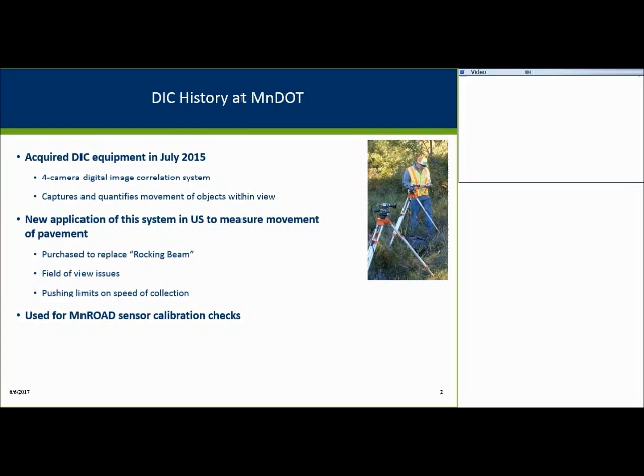That was quite a large learning curve, but we're essentially very comfortable with the system now. We're also able to use this for calibrating MnROAD sensors, so that's another application that we found is very useful for this particular system.

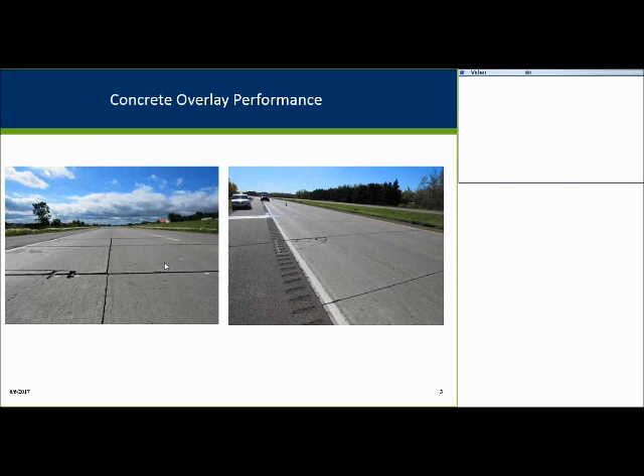My business is trying to characterize what's going on with concrete overlays. You can see by this picture some panels have been moving around. We're very interested in characterizing how they're moving when a vehicle's traveling over them. We can use strain sensors and LVDTs and that type of thing, but really we want to fundamentally know what's happening when a vehicle's traveling over these particular pavements.

So these are kind of the movements that we're interested in measuring—whether it's bending of the panel, or if it's tipping, or you're getting transfer across the joints of the pavement.

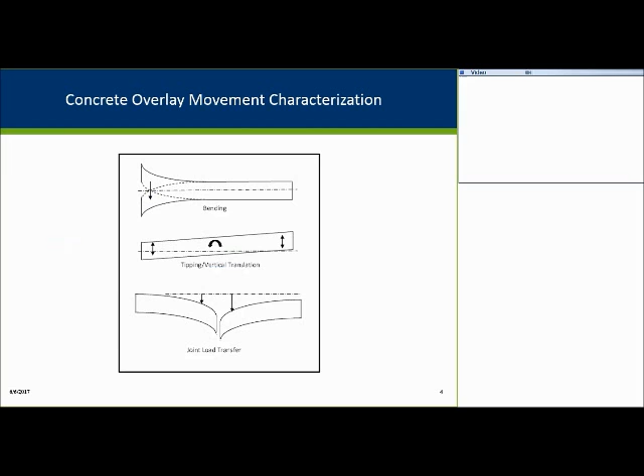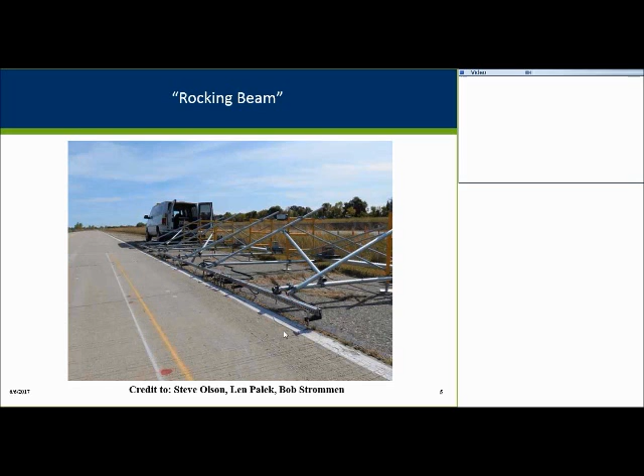This is the infamous rocking beam that I have to credit Steve Olson for being a large part of developing. It essentially consists of a very long piece of metal with LVDTs hanging from the bottom, and as the truck goes by and the panels move around, this system measures it with fairly high accuracy and very good precision. As you can see, it's very clumsy, very hard to set up, not very portable, and it has limitations—you have to hang it off the side because you've got to get the vehicle through.

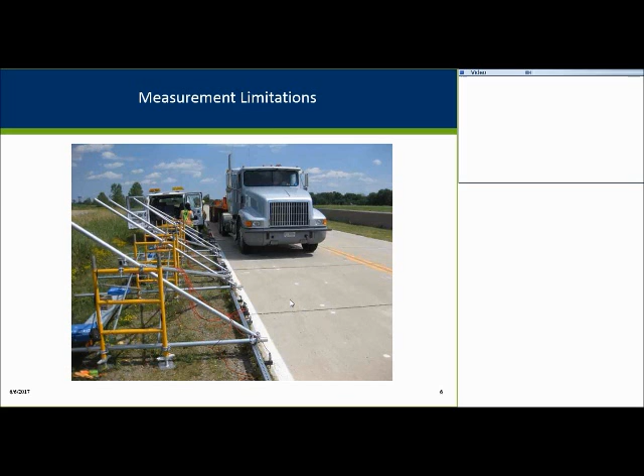This shows at the MnROAD test facility the MnROAD truck going by, and we're measuring the response of those slabs as the truck goes by. So again, you're limited to measuring what's going on at the edge. That's not ideal.

So we found this digital image correlation system. I thought this is a great way to get rid of all that hardware. Essentially, this system, as it will be described later, you can just point it at things, and it's going to measure how things are moving.

We actually took this out on several county roads to measure the movement under live traffic. We have a number of targets that we just glued down, and by pointing at those targets, we can measure and do the same measurement that we had with that rocking beam.

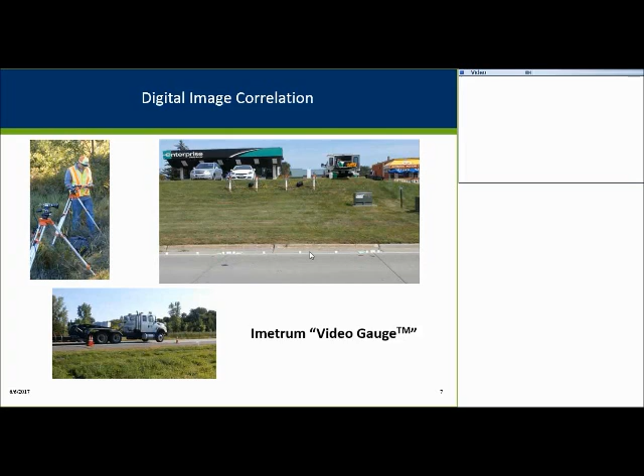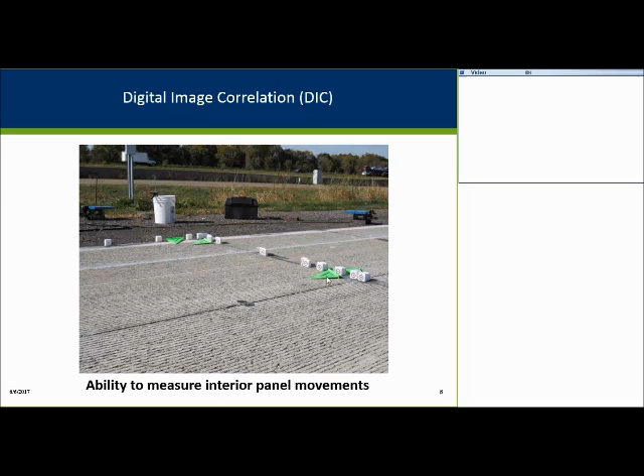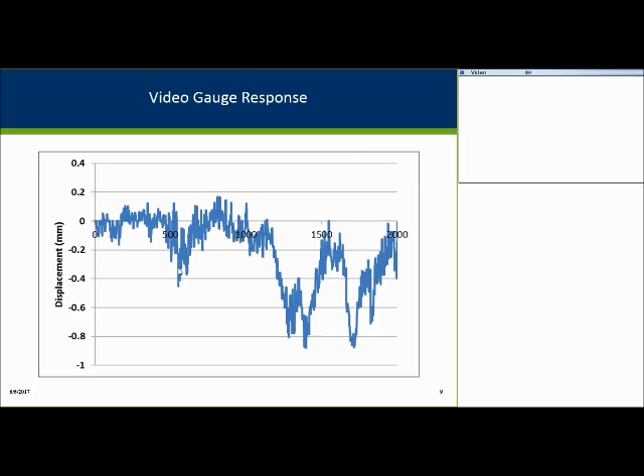And at one point, we actually even pointed the cameras right at the tips of the LVDT to verify that they were both moving in unison. So we're very comfortable that this system has the capability of measuring what we need it to do.

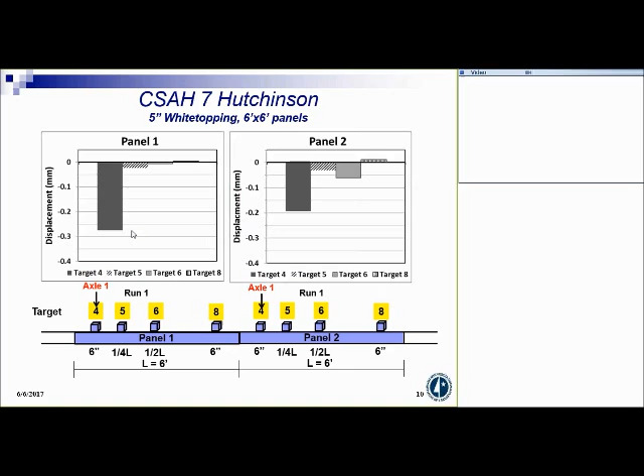So essentially, we learned that as the wheel hits the panel, it's deflecting down. It's not tipping the entire panel. So these are important things that we're trying to figure out as we're doing our research.

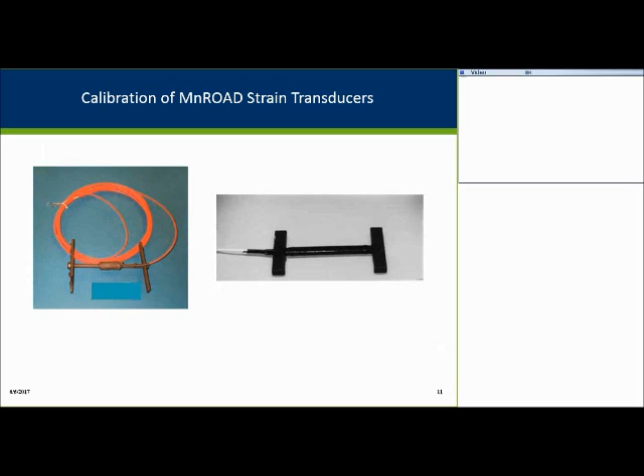As I mentioned before, we also discovered it's a useful tool to calibrate strain gauges. Again, in this case, it was asphalt strain transducers that were being installed at the MnROAD test facility. So here you can see we have a test stand, and we just insert the transducer in there, and then we manually pull and compress it.

Lighting is a very key concept in this process. You need to have very good light. But one of the things about this video gauge is that it actually is designated as an ASTM extensometer, so that's exactly what you need for doing this type of calibration. We're trying to compare, as you pull the sensor, what the video gauge measures compared with what the system is producing.

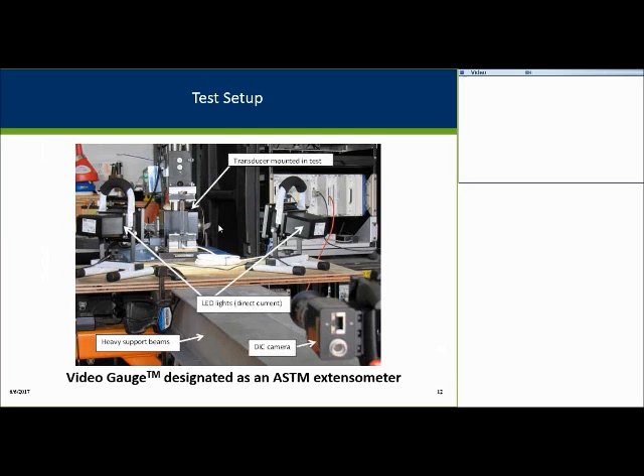We learned a lot of things about where to point it. We had some errors in where you're targeting your image, so you can very specifically target certain areas of the gauge. We had to end up going here at the end of the leg.

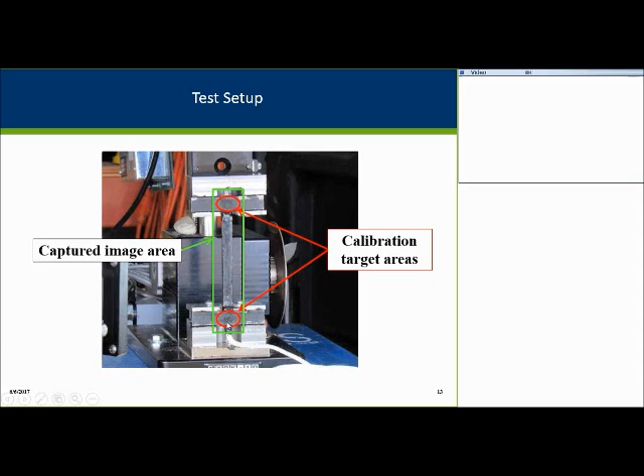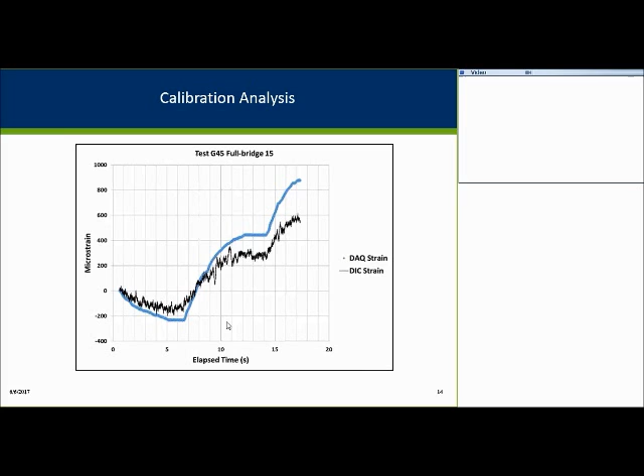So with that, hopefully that was kind of an introduction of how MnDOT's been using this particular system, and now the presentation is going to focus on the other applications the system is being used for, and that's where Amy is going to talk about that. So I'm going to turn it over to Amy at this point.

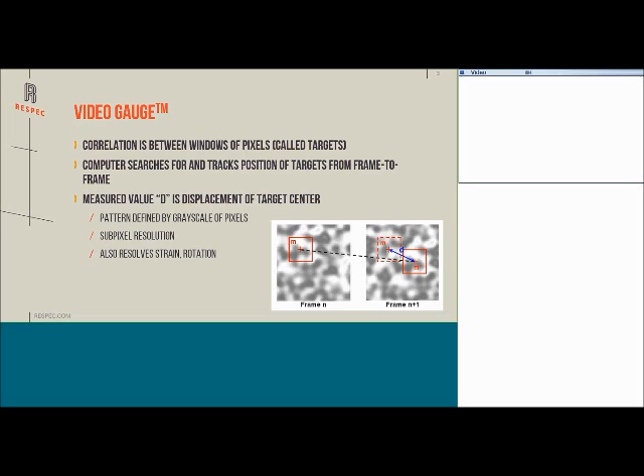And so the equipment is pretty simple. The cameras run off of a system controller, which is just a specialized computer. The cameras are all CCD cameras, and so none of the cameras that we use have storage on the camera. All of the data is transferred directly back to the camera controller while the video is recording. Most of the cameras are powered over the Ethernet cable that also transfers the data, but some of them do need an external power or battery pack, and those are our high-speed cameras that require the extra power.

The cameras are mounted just on a surveying tripod, and that's the entire system. And so the controller can be either powered from a main supply or powered off of batteries when you're in the field. Each controller can run up to 4 cameras. Sometimes additional cabling is necessary to synchronize the cameras if you're using a multi-camera system or for high-speed applications.

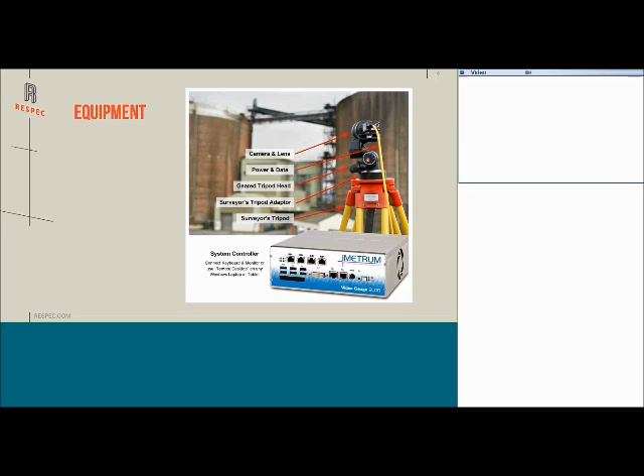And overall, the system's extremely versatile. The speeds are defined by the camera, and the field of view is defined by the camera lens. And so you spec the camera and the lens to your applications. The software is loaded onto the camera controller, and these videos are collected within the software. The processing can either be done in real time when the video is being collected, or the video can be saved and the measurements can be post-processed. So targets can be added or moved after the fact. Post-processing is required for high-speed applications, but for most structural applications, we're able to make real-time measurements in the field.

And so the first case study I want to present is of a steel bridge in Somerset, UK. The developers of the software, Imetrum, are based in Bristol, UK. And so some of these case studies that I'm going to present today were collected by Imetrum, and some of them are RESPEC projects. This first one is obviously an Imetrum project since it's in the UK.

It is a short span rail bridge, and the train that goes over the bridge is a rock quarry train. So it's a heavy vehicle, and it's traveling at 90 miles per hour. There's a drive unit on both sides of the train, and there's 8 cars in between, and we'll be able to pick out in the bridge response each axle for both drive units and the cars.

So in this study, we have both video gauge measurements and measurements from potentiometers to verify the video measurement. The video collection rate is 500 hertz because we expect small, short-lived displacements on this bridge. And our video measurement resolution is 1/10 of a millimeter.

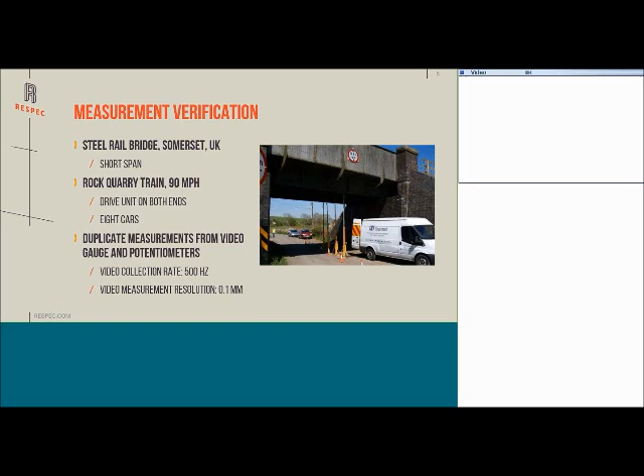And so here is the comparison of the displacement results between the potentiometer and video gauge at 1 point on the bridge. As you can see, there's excellent correlation between the two measurements. At the beginning of a test, we always want a static period to define the zero location of our measurement.

And as the drive unit passes over that point on the bridge, we get our greatest deflection, which is approximately 1.35 millimeters. And then we see a rebound between the front axle and the rear axle on the drive unit. And then this next peak is the first axle on our first car.

So then we have a rebound between the wheels on our first car, the coupler between the first and second car, and then our subsequent 7 more cars. And then we have another great response from our rear drive unit.

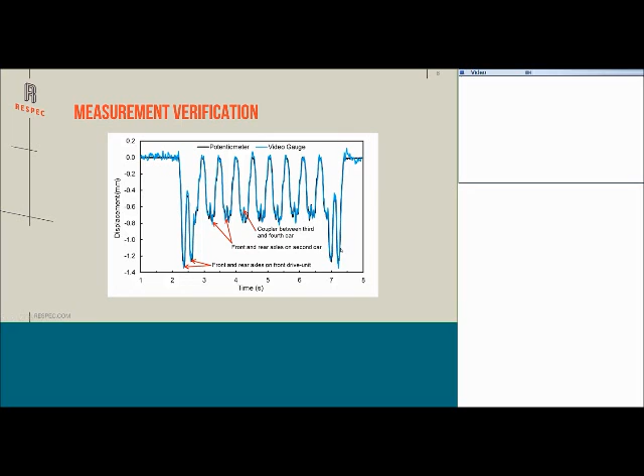And so the advantages of using video monitoring for this application over the conventional instrument, or that potentiometer, is video gauge is fast and easy to set up. Our workers and equipment are out of the traffic, whereas with potentiometers, you have to be able to access the structure, you have to set up your instruments, you have to block off traffic. And so it's a lot more complicated of a setup than just showing up on the side of the road, setting up your camera, and taking a video.

We also have the option for post-processing with digital image correlation equipment. We can add measurements after the fact. We can move measurements. So if we miss the peak deflection on the structure, we're able to capture it after the fact, whereas with conventional instrumentation, you set it up at your 1 point, and that's what you got. You have no chance to repeat it without setting up an entire new test.

And all digital image correlation packages are multi-point, and so you can set up as many points as you want in the field of view as long as you have sufficient pattern.

The next case study that I'll go over is another steel bridge in Ludlow, UK. It is a bolted steel bridge, and this is also a rail bridge for passenger trains that drive at 50 miles per hour and coal trains that drive at 20 miles per hour. And this study is a duplicate study, and so the client brought Imetrum back out to take additional measurements of the bridge, specifically focusing on each joint in this steel bridge.

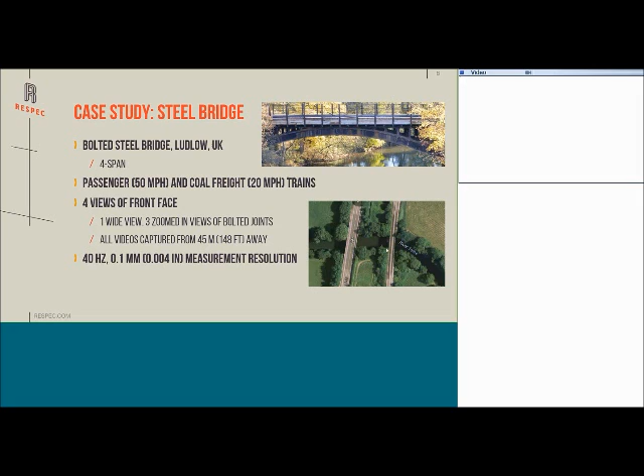And so here are the camera views that were captured from that 150 feet away. And so all 4 of these images were captured using the same model of camera, just outfitted with a different lens. And so these top images of the bolted joints, those will be of a longer focal length lens, whereas a wider angle lens is used to capture the full bridge.

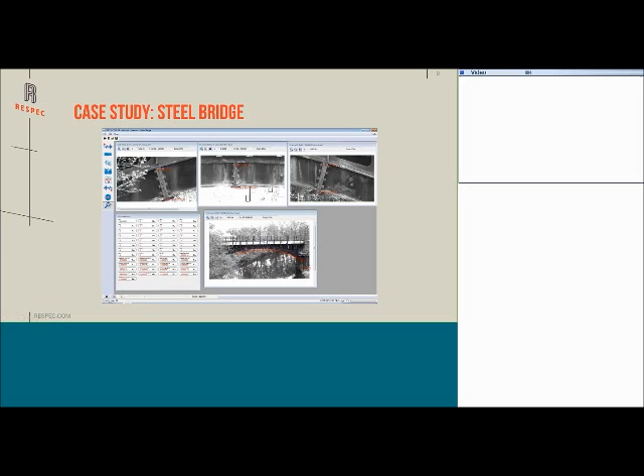And so measurements were made on each of the joints to measure any extension of the joint, so opening and closing, as well as at every stringer there was a vertical displacement measurement set up. And so here are the vertical deflection measurements of the stringer at the mid-joint.

Our maximum deflection is 14 millimeters, and so that's quite a bit more than our last bridge, or especially what we would expect out of pavement. And so that's why in this application, 40 hertz is adequate to give us this nice deflection measurement, because we have large deflections and a pretty slow response.

These results are for a coal train moving at 20 miles per hour, so also slow traffic. Underneath this green box is one of the bolted joints, and this green box is what we call a strain map. This is available in all digital image correlation packages, and it tracks every pixel.

It's making a contour map of the displacements or strains. Over here we'll have a plot measuring the extension at the top of the joint, and we'll be able to see a contour map of the strain as the train moves over the bridge. I'll go ahead and start the video. Up here is just a screenshot out of the software, showing a display of all our measurement points, any graph we've defined, and our video image.

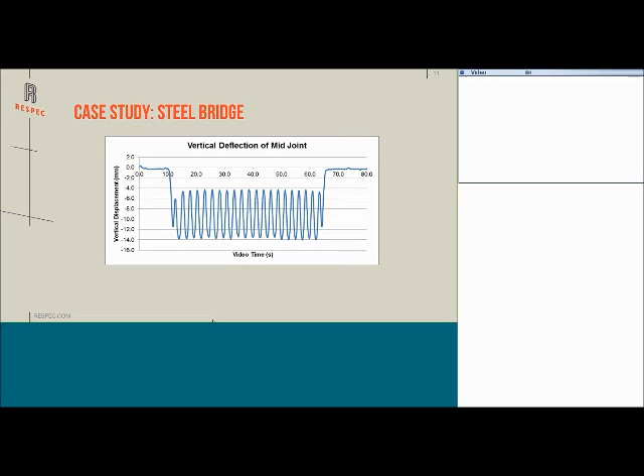The maximum extension of that joint was 1.7 millimeters. These vertical deflection measurements were made across 21 stringers, so 21 different vertical measurements, as well as these in-depth investigations of all the joints.

This next case study is of a railway, an example of a high-speed application. The trains on this rail have a speed limit of 120 miles an hour, but there are rail restrictions in the UK, and if the rail is deflecting too much, they need to put a speed restriction on the track.

Video gauge was chosen for this study because there was limited access to the track. It was impossible to use conventional instrumentation because there was no access.

We did need to spray paint targets on the side of the track. We needed to get close, but couldn't be close during train traffic. Natural pattern was used to make measurements of the ties and the ballast, but for the rail itself we needed additional pattern, so we used spray paint. The videos were captured from 7 meters away, about 23 feet from the track.

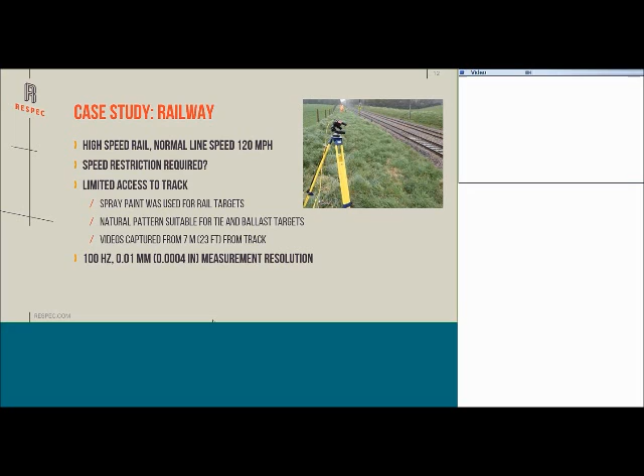These videos were captured at 100 hertz, or 100 frames per second, and we have a smaller field of view in this application. We're focused on a pretty short section of track, so the resolution in this measurement is 0.01 millimeters, or 1/100th of a millimeter.

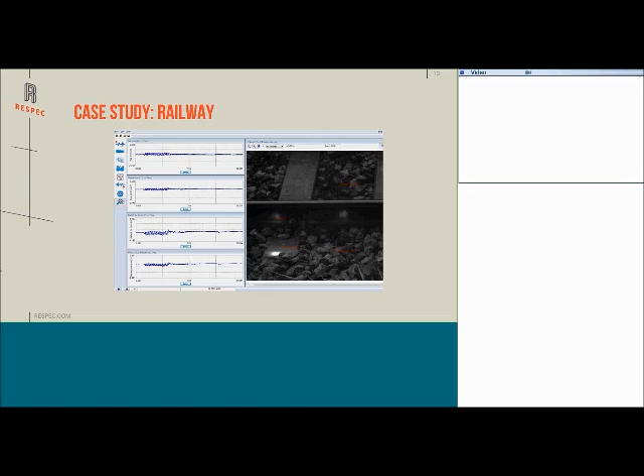As I start the video and you see the displacement response come across, this little bit of vibration is caused by a train passing on the adjacent track, not the track we're focused on. Any minute now, our train should be coming along.

So I'll pause it and describe what's happening. Here we have a target on our ballast material, and in the center of our track we have spray paint marks that we're tracking the displacement of the rail with. We have a target on the tie clip, and then also a target in our ballast material closest to the camera. So from top to bottom, this graph is for our rail deflection, the second graph is for our tie, and then these bottom two graphs, the top one is the far ballast, and the bottom one is our close ballast.

The rail displacement, the maximum displacement is approximately 7 millimeters, and then we do see 5 millimeters of rebound, for a total of 12 millimeters of displacement.

Our tie is displacing more than that. It displaces 9 millimeters down with a 5.5 millimeter rebound.

So the most interesting part of this study is the far ballast measurement, because as our train passes, that target is blocked. But every time we have a clear shot of the ballast in between wheels, the software is able to reacquire that target and continue to make displacement measurements. So we are able to measure the rebound of the far ballast and then the full response of the close ballast material, which is about 7 millimeters down and 2 millimeters of rebound.

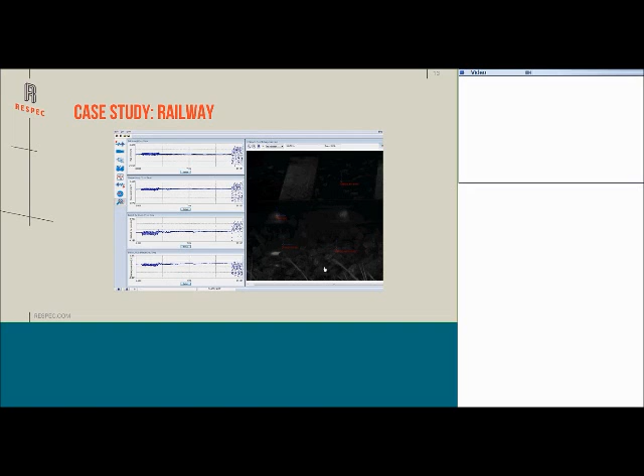These results did prompt a speed restriction on this rail. A total of 12 millimeters of movement is too much. Similar studies are used to determine the timing and evaluate the effect of ballast tamping. So it's a quick and easy way to make measurements to schedule maintenance and verify that the vibration has been reduced.

So this next case study is a RESPEC case study, and the objective is to evaluate the roadbed support. This section of road is on a loading dock, so it's pier supported, and there were concerns about erosion or damage to the pier.

So we set up targets on both sides of an expansion joint. On both sections of the joint, the road is just supported by the pier. On one side is where they were concerned about damage, and on the other side, the pier is expected to be intact.

The roadbed was loaded by this mining loader, and we just drove it back and forth across the road. We did need to use artificial targets in this application. The section that we're monitoring is about 20 feet long, so we needed 8-inch artificial targets, and these 8-inch targets are mounted to steel blocks. We expect that they'll deflect as the road deflects, and we'll be able to interpret the road deflection from the artificial targets.

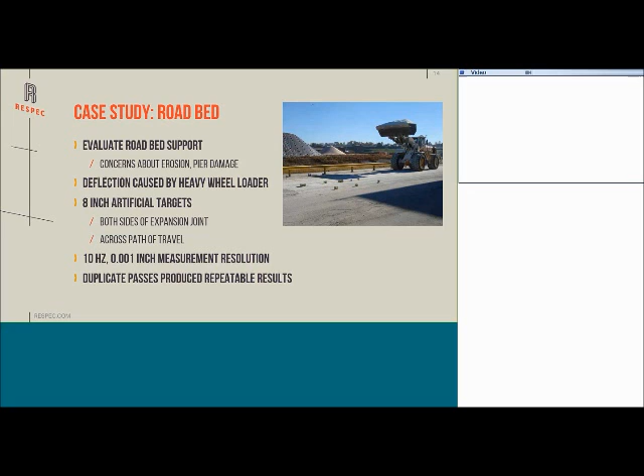We did record multiple passes and were able to duplicate the results exactly. The loader will be traveling from, I think, right to left, if I remember correctly. I remembered incorrectly, the loader is traveling from left to right.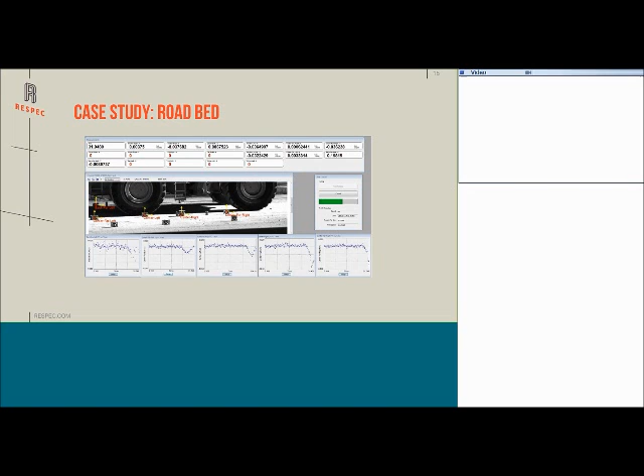So this first graph is for the back far left target, the target closest to the water. Then these next four are for our center targets moving from left to right, so this is our far left target, and this is our far right target. As you can see, the displacement on the right side of the target is much greater than on the left side. If you notice up here, I have quite a few zeros, so I have more targets defined in this video that I'm not tracking. I've defined targets and then turned off the tracking to save computing power.

So here are the responses overlaid. The purple line is the far left target, the red line is the left target, the blue line is the right target, and the green line is the far right target. You can see the progression of the loader travel based off of when the maximum peak is. The far left target responds first and the far right target responds last. The displacement is nearly double on the right-hand side, where we were concerned about damage to those buried piles on the pier.

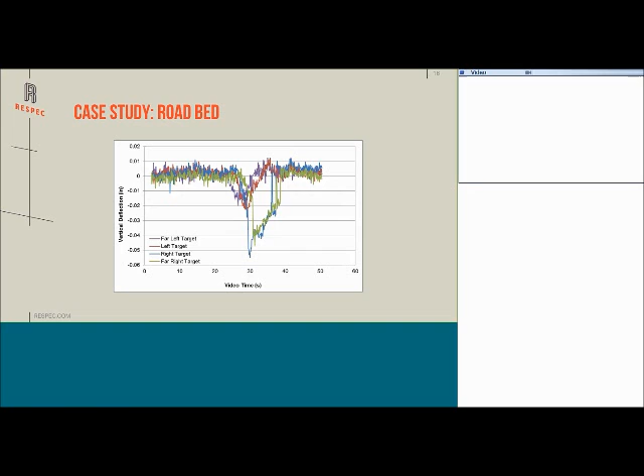And so for applications like this, you can use flat targets to make measurements. In this case, we didn't have enough pattern on our pavement to make an adequate measurement, and so using out-of-plane targets gave us a better result, but it is possible to use a flat target to make an out-of-plane measurement.

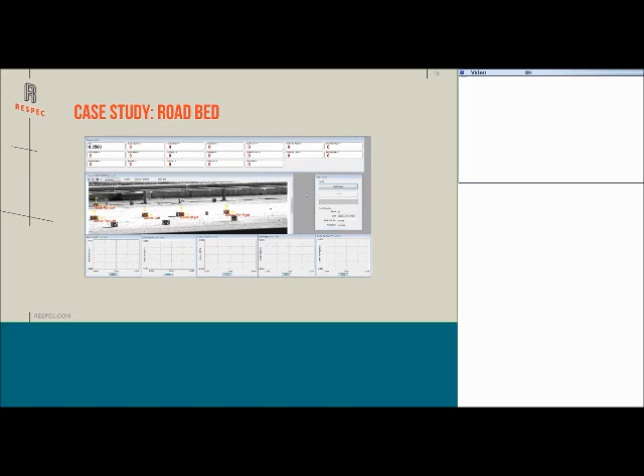And the last case study that I want to go over today is of a parking garage. These measurements were prompted by complaints of excessive movement in the parking garage. This field monitoring was completed in less than 30 minutes, and I can vouch for that. I only put a quarter in the parking meter when I was making these measurements, and I was done before my time expired. So it was a quick and easy measurement.

In that 30 minutes, all I did was measure the distances for the plane calibrations. Like Tom mentioned earlier, all of the measurements are calibrated by knowing known distances within your image. We took 4 passes up and down the parking ramp and measured the deflection in real time, just in pixels, and I went back to my office and post-processed all these results. This test was also collected at 20 hertz, and we expected 5/1000ths of an inch in measurement resolution. So here is the response.

So we attempted to make measurements on every single beam that we can see in view. I have the beams numbered. The one closest to the camera is beam 1, all the way to 17. And the beams are twin T molded beams, and each beam is connected to the beam behind it. That's important to remember when we look at the results.

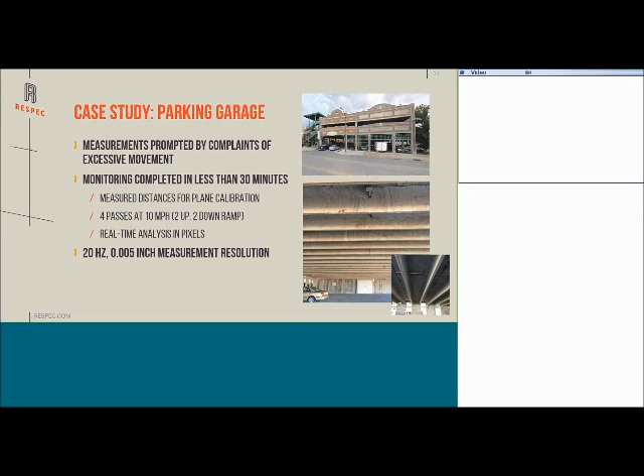Here is all of the 17 beams. You can see that most of them produce comparable results, but we have a couple beams that show much higher deflection. That is because when you're looking at the beams in this image, once you get to those far beams, we have very little area to use as our target, and the software requires at least a 40 by 40 pixel target. So it's something to consider when you're making measurements. We were still able to make measurements, but as we got further away from the camera, the quality of those measurements had more error in them.

As you can see, here is just a depiction of as you get further away, our results are diverging from 0.08 inches of deflection, and that is because of the poor quality of target. So it's not a foolproof system, and care needs to be taken when making measurements and interpreting your results.

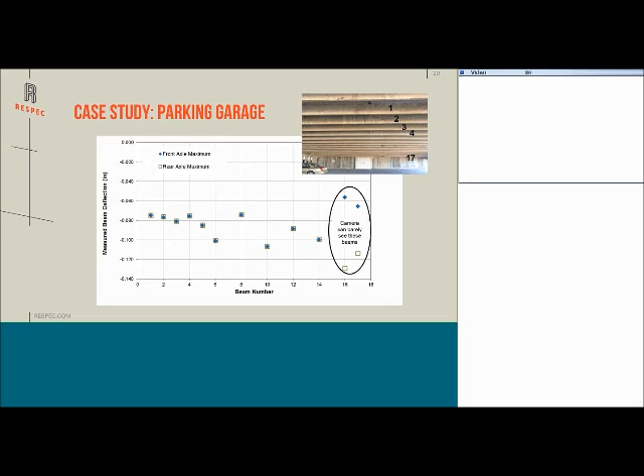So in summary, video gauge is a non-contact displacement measurement tool that has been used extensively in the laboratory and has great potential for structural monitoring and is adaptable to lots of transportation applications, especially highway structures.

It is a multi-point system, so the user can define as many measurement points as necessary in the measurement frame. They can be done in real time or post-processed. Every case study that I presented today is a two-dimensional case study, but 3D measurements are possible by using 2 synchronized cameras, so it is a more complicated setup. It takes a lot longer than just jamming in your tripod legs and flipping on your camera, but it is possible to make 3D measurements.

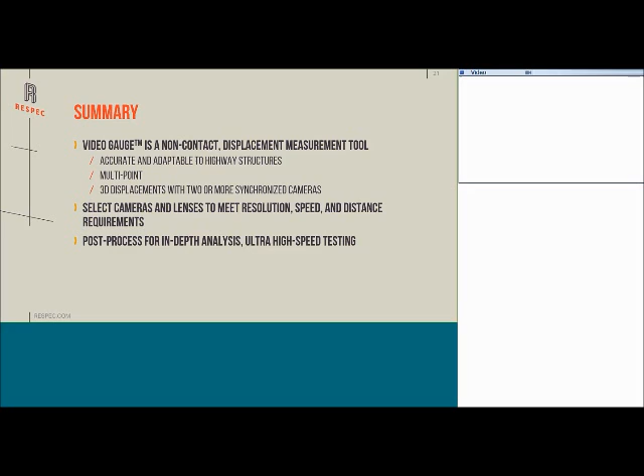It's highly versatile. The exact same system was used for all of these case studies. Just specific cameras and lenses were selected to meet the resolution, speed, and distance requirements.

The advantages of digital image correlation technology over conventional instrumentation is no access is needed unless you need to apply artificial targets, and we've gotten pretty creative in how to apply artificial targets when you can't exactly reach your structure. We often use paint rollers on a long stick to roll on sticker targets to our structures.

It's relatively fast and simple to set up. There's not a whole lot of equipment, and everything is always a safe distance away from traffic, and that's most important.

Safety as well as convenience. No lanes need to be closed. Traffic doesn't need to be diverted to make measurements. And the option of post-processing is my favorite because I can go back to my office and do most of the work instead of sitting out in the cold and rain. And not only is it convenient, but I can add measurements, I can move measurements.

That's just not possible with conventional instrumentation. There are some measurement considerations in addition to what I was pointing out during the parking garage case study, just knowing how to use the software correctly.